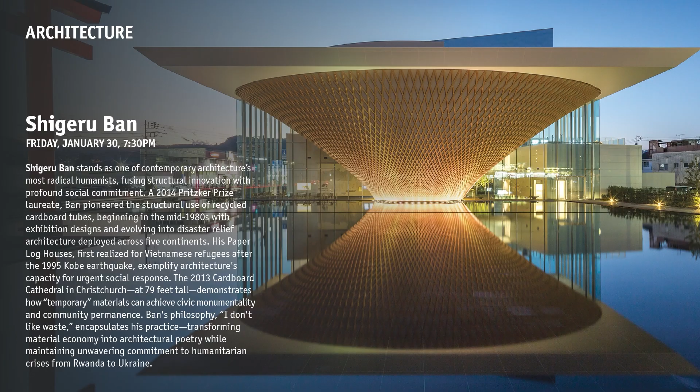Shigeru is from Tokyo, and he studied architecture right here in Los Angeles at the newly founded Southern California Institute of Architecture, SCI-Arc, back in the late 1970s, just after finishing high school in Japan, and I think he was like 17 years old. We were lucky enough to host Shigeru and the legendary late great architect Ray Kappe here at the Hammer in 2007.

Ray, who was the founding director of SCI-Arc and served on the admissions committee, told us that when he saw Shigeru's portfolio, his talent was so evident right off the bat that he had him just skip the entire first year curriculum. And by the way, you can watch the video of that. It's on the Hammer channel.

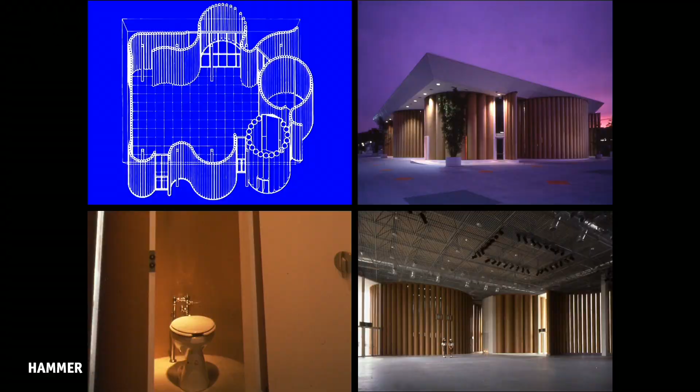1990. Actually I started developing in 1985, before people started talking about ecological issues, environmental issues, recycling. I just wanted to use this humble material for building structure, not to waste it. This is a temporary exhibition hall. It was too difficult to get government permission to use such an unusual material for structure. So this building is made with steel columns and a steel roof, and paper tubes were used as freestanding interior and exterior walls.

There are 300 tubes, 8 meters in length, about 27 feet. The diameter is 55 centimeters. Wall thickness is 3/4 of an inch. And of course, inside is empty. Some of the tubes are bigger; the diameter is 4 feet. Inside is a toilet. In case you finish your toilet paper in an emergency situation, you can tear off the inside of the wall. Next, please.

Nobody hired me to design a building out of paper, so I had to make my own weekend house to get government permission. I spent a year testing. Finally, I got the permission. So this became the first permanent building with a paper tube structure. However, I'm busy traveling. I have no weekend. That's why the house is still empty. But it's still there. Next, please.

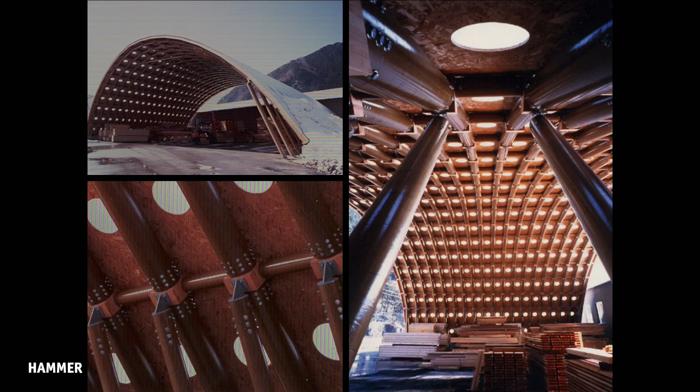A few years after, I was asked to design a big roof for local carpenters in a very heavy snow area. They wanted to build it by themselves without a steel structure. So this is the second permission, with paper tubes with wooden joints to make a permanent structure with government permission. It still remains. Next, please.

In the year 2000, the world started talking about environmental issues. This is the World Expo in the city of Hanover in Germany. The main theme of the Expo was environmental issues. Because I was the only architect using recyclable material for buildings, I was chosen to design the Japanese pavilion. I was very lucky, as I was introduced, to collaborate with a genius architect from Germany, Frei Otto, to make the first paper tube grid shell structure.

These paper tubes, of course, were produced locally in Germany. As part of the contract, they had to promise us to collect all the paper tubes after the building was demolished and recycle them again. Also, I didn't want to use concrete because concrete cannot be recycled. I made a wooden box filled with sand instead of a concrete foundation. Membrane: normally we use a PVC membrane, but PVC is not environmentally friendly. I made a membrane out of paper. Because paper is an industrial material, we can waterproof or fireproof it easily.

And we had to test in Germany. This is the one we developed. And this yellow scaffolding can be rotated by hand to push up little by little, to create three-dimensional forms to stabilize the structure. Next, please. We covered over 25,000 square feet. The connection is just fabric tape.

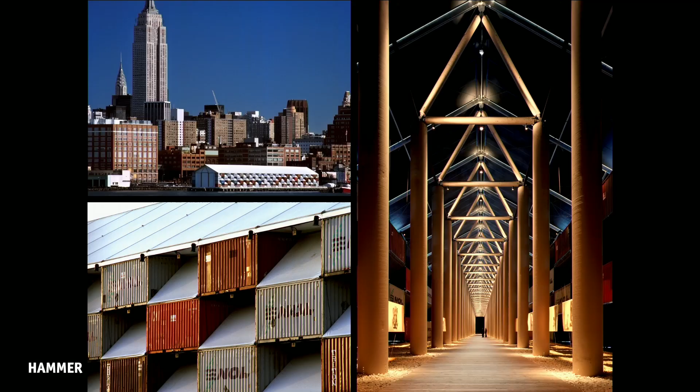It's very inexpensive, easy to install, easy to dismantle, so that most of the material was recycled. Next, please. This is called Nomadic Museum. This is a movable museum for the Canadian artist Gregory Colbert. He asked me to design his own museum to travel from city to city, country to country.

The first one was built in New York on the wooden pier. This is about 200 meters. I used 20-foot shipping containers, not because shipping containers can be traveled. I used shipping containers because this is an international standard. We can find used containers anywhere in the world. So here in New York, we just rented the used containers during the exhibition for 4 months.

And after New York, we went to Santa Monica, Los Angeles, without bringing containers. We just returned them to the original shipyard after the exhibition was over. Then we came to Los Angeles without containers because we can rent the same kind of container locally in Los Angeles.

In order to minimize the number of containers, I made a checkerboard pattern, and there's an existing connection in the corner to stabilize the structure. Inside, there are paper tubes of 33 feet length to support the roof, and Gregory's work was exhibited in between the columns.

Next, please. Here in Santa Monica, the parking lot we rented was not big enough to put the 200 meters, so we divided it into two 100-meter galleries, and Gregory additionally asked me to design a theater space, so I kept the space between the 2 galleries and put a new membrane roof to create a theater space. The number of containers is exactly the same as New York, but the size of the museum became 50% bigger than New York.

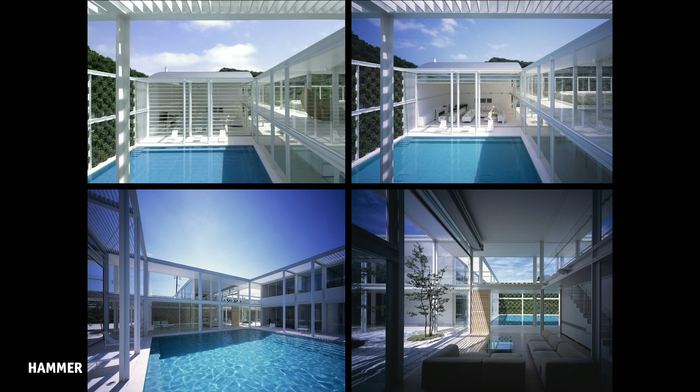This is a house in Fukushima. It's a rather big house for a Japanese house. However, there is no nice view around the house, so I made a courtyard and swimming pool, so that all the rooms are looking into the courtyard and swimming pool. And the client loved to swim.

So this is a big window made of a glass shutter, which is normally used for fire stations. I just improved it for residential use. You just push a button, it goes up immediately to connect inside and outside. Even this family room, when the glass shutter is open, is connected to the courtyard. So all the rooms are connected inside and outside. Next, please.

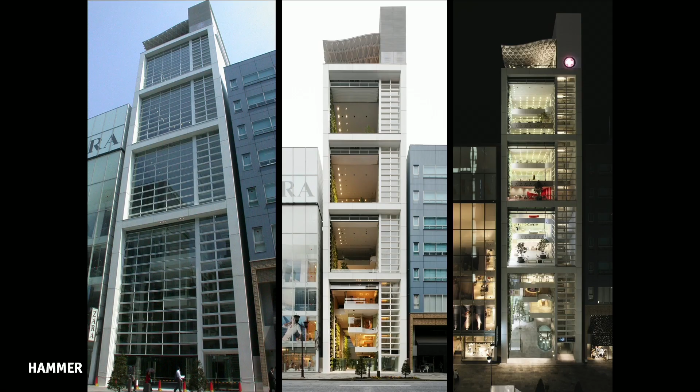This is the building in Ginza in Tokyo. Ginza is the most expensive commercial land in the world. That is why the site is very narrow and very deep. This was a competition for the headquarters of the Swatch company, the watch company group from Switzerland. The upper 9 floors are offices. Every 3 floors, they have atriums.

And normally, even during the nice seasons like spring and fall, the atrium has to be air conditioned. But I thought that is a waste of energy. So by opening the shutter, we can take advantage of natural ventilation without depending on air conditioning.

One of the challenges, this was not requested for the competition. They want to have 7 boutiques of the brand names they have, like Omega, Tissot, Jaquet Droz, Blancpain, and so on. Because the site is very narrow, if we have one boutique in front of the busy commercial street, the rest of the 6 boutiques have to be downstairs, upstairs, or at the back of the house.

And then I thought that's very unfair not to have direct access from the street. So this was my own challenge, to have a direct access from the street to all of 7 boutiques. So what I did is opening the glass shutter for 4 floors in front and the back, creating the natural public passage inside the building with green wall and some water feature. And along this passage, there are 7 glass showrooms of each boutique.

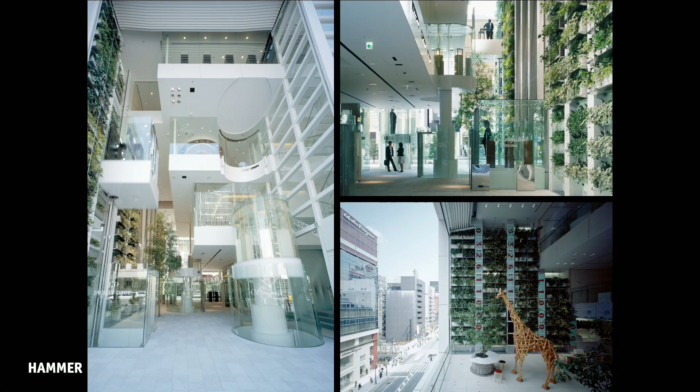Next, please. So like this. So there are 7 glass showrooms of each brand name. You can come in to take a look at the latest collection. If you want to see more, you have to push this button. Each showroom is made as a hydraulic elevator, bringing the customer to their own showroom here. This one goes to here. This one goes to here. So this is an unusual way to make all the customers go to the boutiques directly from the street. Because of this unusual idea, I won this competition to build this building.

This is the 5th floor customer service. You don't need to own the Omega watch to come to this space. It is free to come in. So if you have a chance to come to Ginza, please come in. This is when the glass shutter opened, so this became semi-outdoor indoor space.

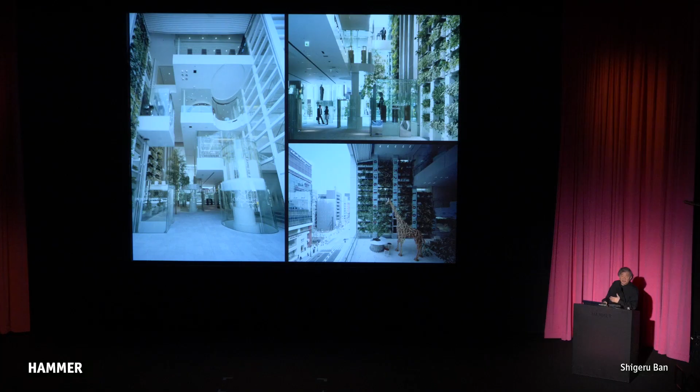And there's the true story about this giraffe. Just before the completion of the building, the president of the Swatch came to see the construction. I showed her around. And when I brought her into this space, she was very surprised. She said, "Where's the giraffe?" She misunderstood. During the presentation of the competition, in order to show the height of this space, I drew the giraffe in the section drawing, and she thought that is the final design.

So she was very mean; she said, unless I see the giraffe, I don't want to accept it as a completion of the building. So I had to spend my own money to make a giraffe out of wood. This is really a true story, not a joke. Next, please.

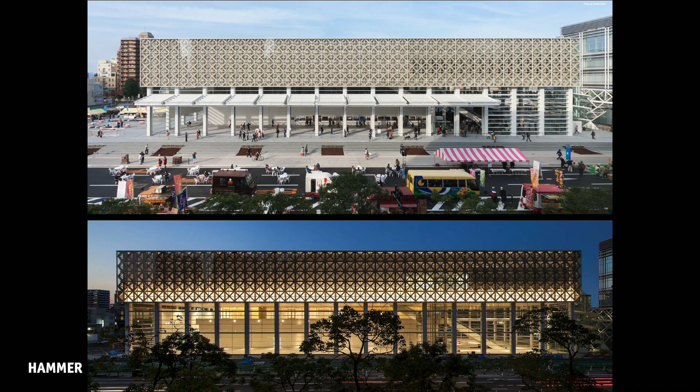This is a museum in Oita Prefecture in the south of Japan. Normally, we call the museum a black box or white cube because a museum is rather a closed building. But I wanted to open the museum to the street and public. So I created the so-called bifolding door to open the facade totally. Often they close the street to have a public event so that we can connect the inside of the museum with the event outside, so that people can come into the museum freely.

This Oita Prefecture is very famous for bamboo craft. So for the third floor gallery, structurally I used timber that looks like a woven bamboo pattern. Next, please. This is how the bifolding door can be opened. And the gallery on the ground floor, the ceiling is hung from the upper floor. That's why there are no pillars. There is a movable partition inside the wall to make any partition layout for different types of exhibition, or they can totally close. It's very flexible.

You can go up to the third floor, another lobby with the lattice work in timber, like a woven bamboo, to bring natural light into the lobby space. Next, please.

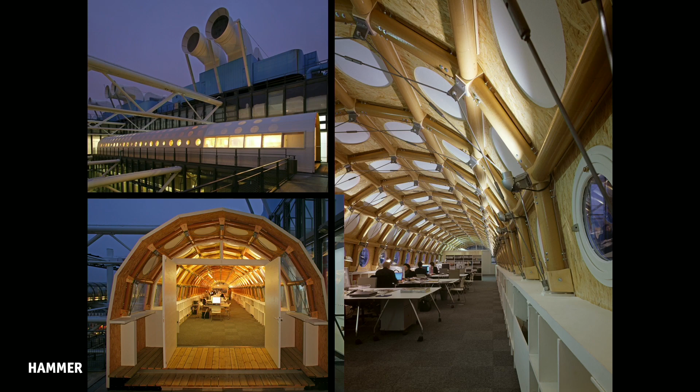This is the famous Pompidou Center in Paris, the national modern art museum in France, built by Renzo Piano and Richard Rogers, completed in 1977. In 2003, they organized an international competition to make a second Pompidou Center in the city of Metz, and I was very lucky to win. And I wanted to open my office in Paris because even very famous Japanese architects, for example, Tadao Ando, Isozaki, when I visited their museums built in a foreign country, often the completed building is different from what they submitted for the competition.

Then I found out why. Normally, we have to collaborate with local architects. Although we carefully choose the local architects, they often become our enemy. If they listen to us too much, they're going to be over budget or over the construction period. Instead of listening to us, they take the side of the local client because they have to take care of the building for many decades. That is why often the completed building is different from what was submitted for the competition.

I didn't want to miss this wonderful opportunity by working with bad local architects, so I decided to do all the construction documents and supervision of the site by myself by opening an office in Paris. However, renting an office in Paris is very, very expensive. I couldn't afford it. So when I met the president of the Pompidou Center for the first time, I asked him, please lend me the rooftop or terrace.

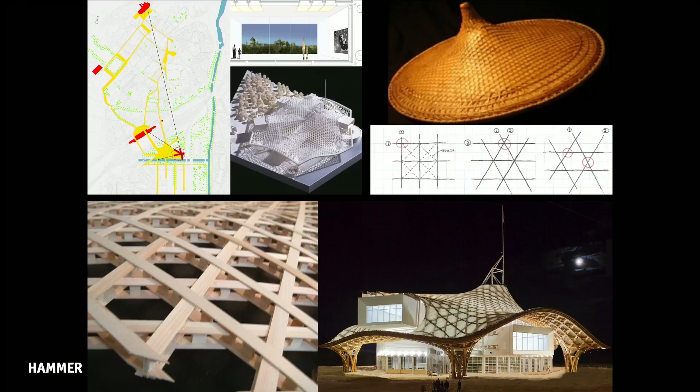Next, please. This is what I submitted for the competition. This is a map of the city of Metz. This is the central train station, 90 minutes by TGV high-speed train from Paris. Our site was the south side of the train station. The center of the city is the north side of the train station. Although we are far away from the center of the city, I wanted to connect my museum with the city.

So what I did is the following. This is the model I submitted. There are so-called gallery tubes. They're 50 feet in width and 300 feet in length, shifting 45 degrees, stacking on top of each other. At the end of each gallery tube, there is a big picture window. The top tube is facing the cathedral.

This is very famous. They have stained glass designed by Chagall. The first tube's picture window is framing the cathedral. The second tube is framing the train station. Because Metz is on the east side of France, after the wars it was occupied by Germany. There's much beautiful classical German architecture all over the city, including this train station, so this became an important history of the city. So the second tube is framing the train station. That's how I connected my museum with the center of the city.

The roof is made in timber. This is where the idea of the roof came from. This is a traditional Asian bamboo hat. I studied different patterns for the roof structure. Let's say if we divide by squares, it's easy, but the square doesn't have in-plane stiffness, so we need cross bracing, and the connection joints become very complicated. If we divide with triangles, it's easy and very stable without any bracing. But as you can see, at all the connections three elements are meeting, so it's rather complicated.

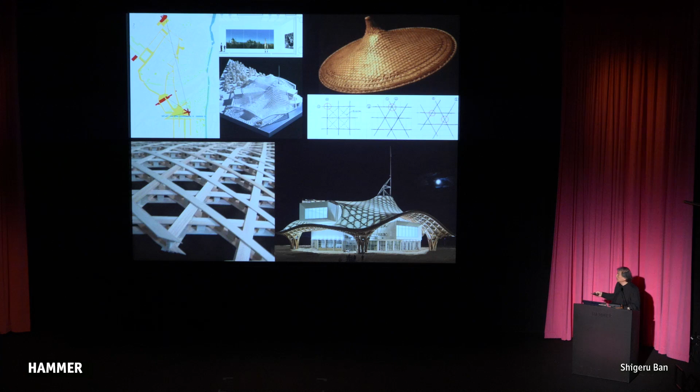Next, please. This is the completion. These are the picture windows, and people are waiting outside the glass shutters before opening hour under the big roof. Next, please. Then after opening, all the glass shutters open to connect inside and outside. This is a picture window framing the cathedral. The central tower is in steel for the elevator and the emergency stair, so this timber structure is hung. It's a suspended structure. Next, please.

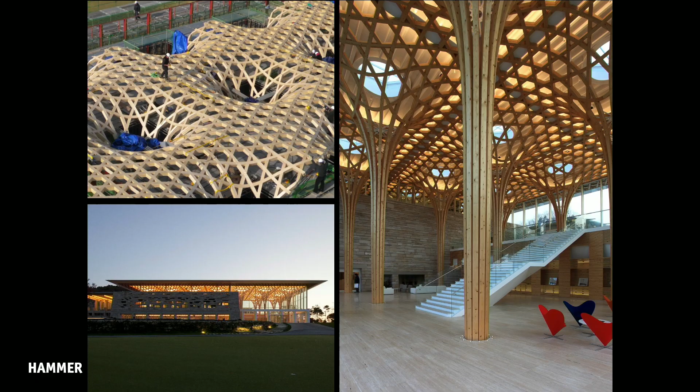While I was designing the Pompidou Center in Metz, I was asked to design a golf clubhouse in South Korea for one of the big companies. The chairman of this company loved my design of the Pompidou Center Metz. He wanted me to use a timber roof. So this is the assembling process.

All the timber was made in Switzerland. This three-dimensional cutting technology only exists in Switzerland and Germany, not in Korea or Japan. Normally I want to use local material as much as possible, but this was a request from the chairman to use this Swiss technology. So we cut all the timber in Switzerland and assembled it locally in South Korea.

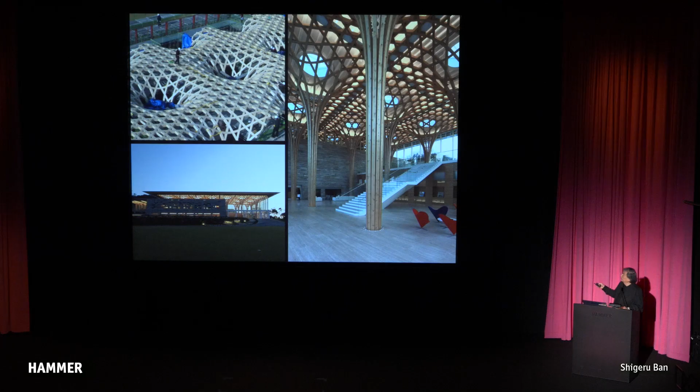Because I don't play golf, I didn't know what is inside the clubhouse. My only memory was when I was very small, my father used to take me to the practice range. At that time, we put the ball on a wooden tee. So that was my memory. Now it's in plastic. So this is a structure like a wooden tee.

Next, please. The same client asked me to design an employment training center on the same beautiful campus. The main function of this facility was a big auditorium, maybe twice as big as this. So it's a black box. I didn't want to put the black box on top of the beautiful landscape, so I put it underground. But I didn't want people to feel like they were underground.

So this is the foyer for this auditorium. It's a timber structure supporting the roof in glass with water. And each timber column has a pot made of stainless steel with mud, growing trees. So the pattern of the trees on the roof was extended onto the water pond, bringing light and shadow floating in the wind. Next, please.

This is a 7-story office building in Zurich, Switzerland. In Europe, they have a very good regulation called oversizing, where the wood protects itself from fire without any protection. By testing, we know that an extra inch, 25 millimeters, works as half-hour fire protection. 45 millimeters, a little bit smaller than 2 inches, works as 1-hour fire protection. So this extra thickness itself works as fire protection for the timber.

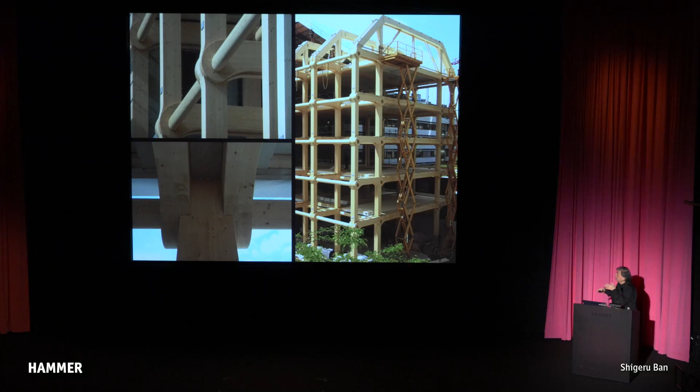So this building was built with this oversizing regulation. That's why we can expose the timber totally. Also the connection, again, I didn't want to use a steel connection. So the idea is the post with the 2 beams and the perpendicular beams, and the profile is oval. The oval profile beam is inserted. It doesn't rotate, it's locked. That's why it's good for lateral force without any steel connections.

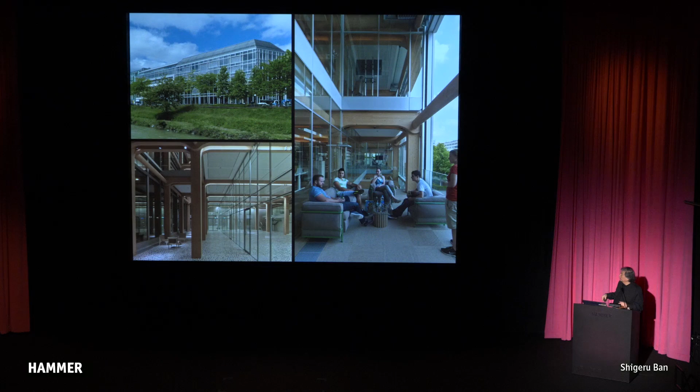Next, please. The exterior is a normal aluminum curtain wall with horizontal lines. This is a glass shutter, which can be totally opened to connect inside and outside to take advantage of natural ventilation. Next, please.

In Japan, we don't have a good regulation like Europe. We don't have a fire protection regulation like oversizing, so even to make a 7-story timber structure, the wood has to be covered by plasterboard, gypsum board, and finally covered by a very thin finish of wood. It's a fake. I don't like this kind of fake timber structure. So because of that, I came up with a new idea.

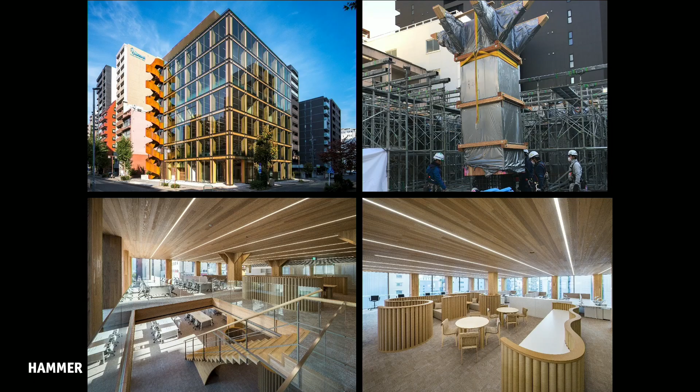This is a concrete form made of CLT, cross-laminated timber. Normally, we make a concrete form with wood. Then after the concrete is dry, we remove the concrete form, throw it away, and finish with stone or wood or whatever they like. So there are many layers, and the concrete form is wasted. So here, I made the CLT concrete form kept as the final finish for the columns and slab, so that it's not only the finish, but we can save a lot of time removing the forms and finishing again.

Also, this CLT concrete form reinforces the concrete for bending. So it's working together as a hybrid of concrete and timber for the lateral force, and it looks like a timber structure. Next, please.

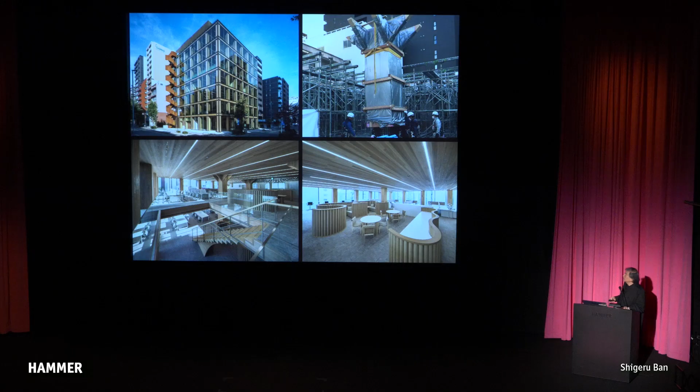This is a project called La Seine Musicale in Paris. It's a music theater complex. This is an island on the Seine River. It used to be a Renault automobile factory until the 80s, then they moved out and it became empty. The French architect Jean Nouvel made a master plan. They organized a competition to make a theater complex, and I was very lucky to win this competition.

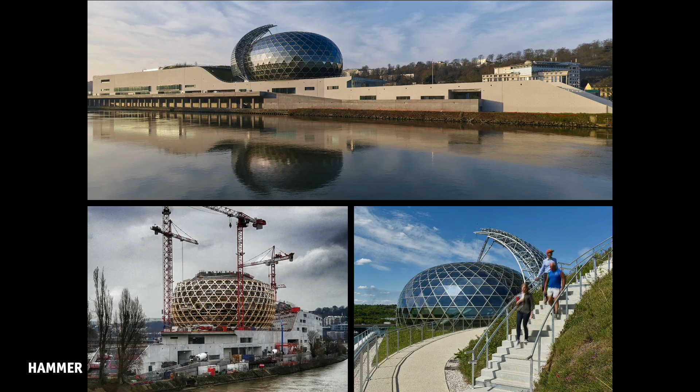Because the location is kind of an intersection of many different highways, the local government wanted some kind of symbolic form for this project. I made a 1,200-seat classical music concert hall as an egg shape in timber, clad with glass. And this is a sail, like a ship.

Instead of receiving wind force, it receives sun and generates energy, and it rotates following the sun, so the sail is always facing the sun, generating energy efficiently and creating shading behind to save on air conditioning. Also, depending on the time of day, the shape of the building is different.

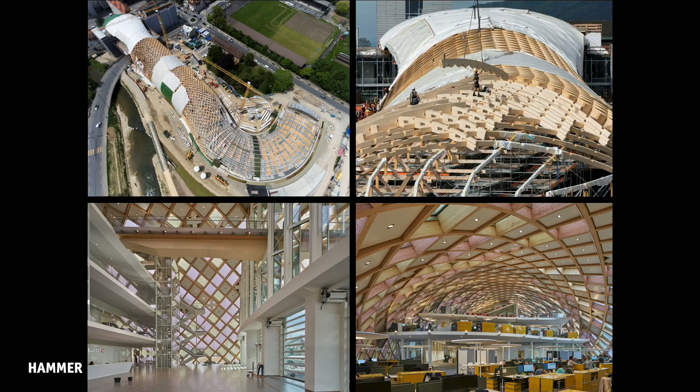Next, please. These are construction photos. Using this advanced timber cutting technology in Switzerland, we can cut each piece very, very precisely, so that we just need a hammer to fit them very easily and quietly. And this is the inside of the office, inside the foyer, lobby space. Everything is made in timber.

Next, please. The building in front, this is the museum for Swatch and Omega, and also a conference hall. Only the ground floor, the pilotis, is made in concrete. The rest of the four floors are made with timber beams, timber posts, and timber floors. And this is the conference hall. The roof is coming from the Swatch headquarters, covering the conference hall. Next, please.

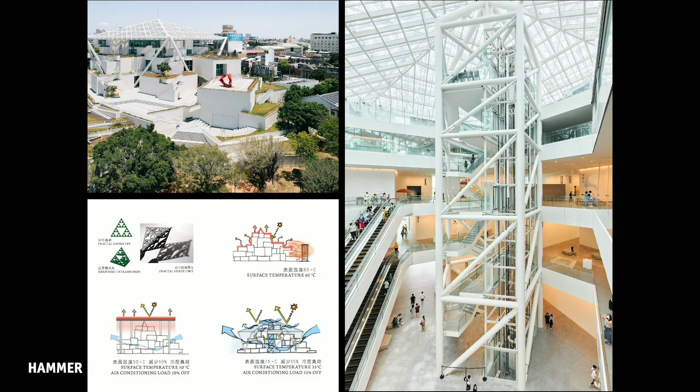The fractal roof is based on fractal geometry. With fractal geometry, you can divide, for example, this is the triangle fractal geometry. You can divide, and you get the same proportion of triangle forever. And Professor Sakai of Kyoto University found out, by making three-dimensional fractal geometry with openings, that putting it in the wind creates movement of the air, so he made a small pagoda, a rest space in the park. So I collaborated with him to make a big fractal roof.

This is a computer simulation. Let's say that the building is exposed to the sun. The surface temperature becomes 60 centigrade. I already forgot the Fahrenheit.

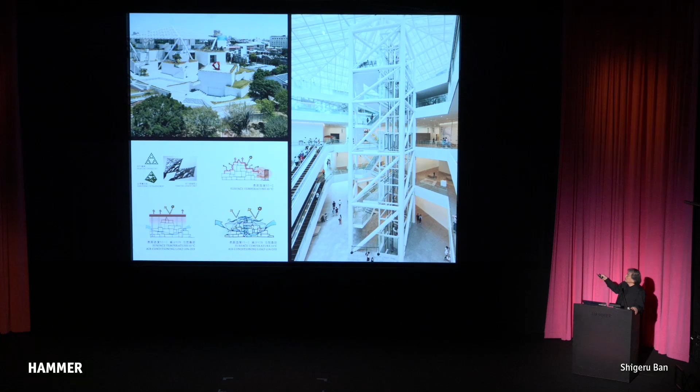Let's say 60 degrees. If we have a roof, we can save about 10% of the air conditioning, but still the roof makes radiation. Having the fractal roof is like being underneath big trees, because each leaf makes movement of air. That's why it's very cool being underneath big trees. It's the same effect. And by computer simulation, we found out we can save about 15% of the energy. So that is why I put the big fractal roof on top of the building, creating light and shadow, bringing it into this atrium space. Next, please.

This is a museum and hotel restaurant in Hiroshima. It's a big, long site facing the ocean, and this is a private museum, and 10 villas to stay over. These are the villas I designed a long time ago. You can stay over, and the restaurant, and these are 8 cubes, which are movable galleries.

Because the site is away from the center of Hiroshima, in order to make people come back again and again, I wanted to make the museum galleries move. Depending on the type of exhibition, the layout of the galleries can be adjusted and changed. Also, Hiroshima is very famous for shipbuilding companies. There are many shipbuilding companies.

I collaborated with a shipbuilding company to make floating galleries. This was made by the shipbuilding company on a barge. As you know, a barge is a steel plate floating on the water without an engine. They bring the materials. So each gallery was made at the shipbuilding company, brought over by ship, and a crane put it on top of the water. Next, please. Each one, normally the foundation, the bottom of the gallery, is sitting on the bottom of the pond.

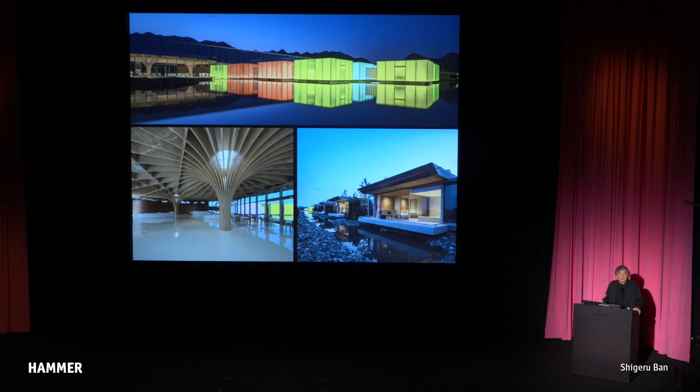By adding water, they can be floated. Then only two men can push them to change the location of the galleries. And this bridge can easily be displaced to connect to the other opening to have a different layout of the gallery. So depending on the type of the exhibition, the shape of the museum changes.

This is the foyer made in timber structure, and there are 10 villas to stay over. If you have a chance to come to Hiroshima, please stay over here. Next, please.

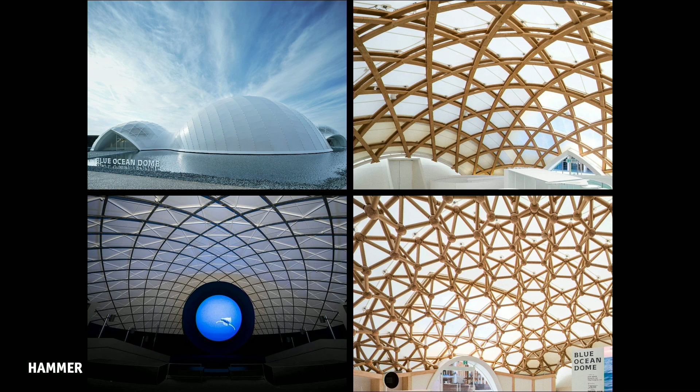This is the Expo Pavilion. Last year, we had the Osaka Expo, and this is the pavilion called Blue Ocean Dome. The problem of building a pavilion in Osaka was the site was reclaimed land. That's why the ground condition is very weak. Even building a temporary structure, they have to put concrete piles, or they have to make a special foundation to support the building. But it's wasted, because after half a year, they have to be demolished.

As you know, maybe if you have seen, they made a big wooden ring. They spent $270 million to be wasted after half a year, because they have no use. But I didn't want to waste the material.

Like the Hanover Expo, where I made a paper tube structure to be recycled, this building is going to be reused in another location. I have a project in Thailand, and my client bought this building to put on their site. But also, I didn't want to make a special foundation in concrete, so I made a very lightweight structure in order to avoid the concrete foundation.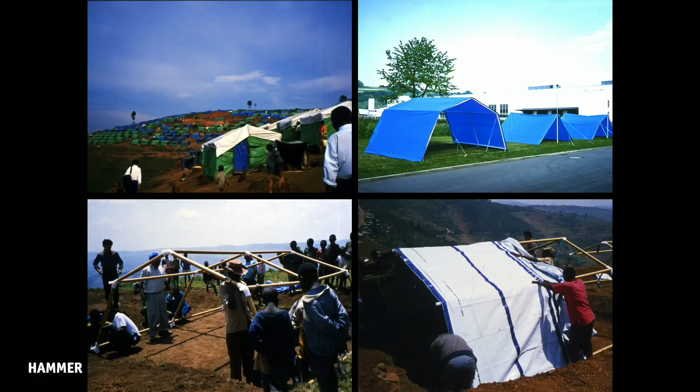This is the Byumba camp. I went there to put up the paper tube shelter. Also, I wanted to make something more comfortable. However, because of United Nations policy, we are not supposed to give them something too comfortable, because if the shelter is too comfortable, they're going to stay there longer.

The United Nations want them to go back to their original village and city as soon as possible, so that I got only $50 per unit. So that's why this development is only to stop deforestation.

And I proposed to the priest, why don't we build a temporary church out of paper tube? And he thought I was crazy, proposing building the building out of paper after the fire. So he didn't believe me. But I didn't give up. So I commuted to Kobe every Sunday.

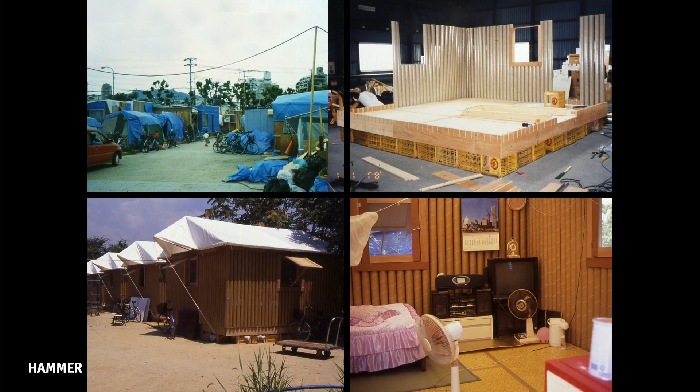Next, please. Then I got to know the Vietnamese people. They were living like this in the park with a plastic sheet. On fine days, inside became totally like a greenhouse. It's so hot, and on rainy days it totally gets wet. Although the government started building temporary houses, because Kobe is very dense, all the temporary houses were built in the surrounding area. But the Vietnamese people had only jobs working for a particular factory in a particular area. They didn't want to move to the temporary houses because they could not continue commuting to the factory. So they wanted to keep staying in this park.

But the neighbor Japanese people tried to kick them out because they were afraid this park was becoming like a slum. But they had no place to go. So I thought that we had to provide them something comfortable, but the shelter had to look totally temporary to be accepted by neighbor people. So I brought my students to start building the temporary shelter with paper tubes and beer crates.

At that time, in Japan, there were two major beer companies called Kirin and Asahi. They are competing, and Asahi made their beer crate red, which doesn't go with the color of the paper tube. So I asked the Kirin company to donate. And we were very disappointed because Kirin is such a big company, and we were expecting to have beer crates with beer inside, but they were totally empty.

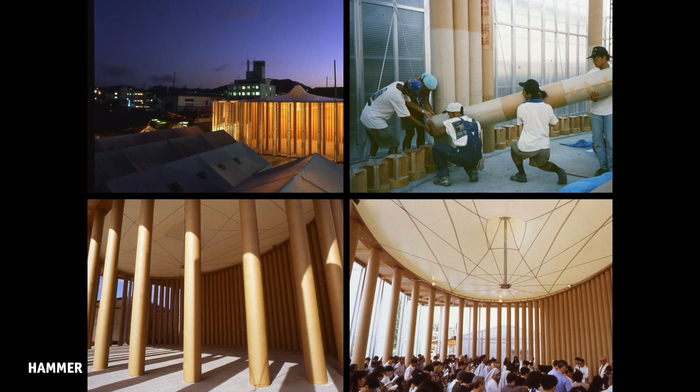This became a community center and the symbol of reconstruction of the city, used for many public services: weddings, concerts, movies, meetings, so this became not only for religious services, but also a community center. After 10 years, they decided to build a bigger one that I was very lucky to design, but also there was a big earthquake in Taiwan. We decided to donate it. Next, please. We disassembled it to ship over to Taiwan and rebuilt it as a permanent church and community center. It's still there. So this became permanent.

Then I wonder, what is the definition of a temporary structure? What is the definition of a permanent structure? As you can see in a big city like Los Angeles or Tokyo, suddenly big concrete buildings disappear, especially commercial buildings. A building made to make money, even in concrete, can be very temporary, because another developer buys the site and destroys the existing building to put up a new one. So even a building made of paper by students can be permanent as long as people love it. So that's my definition of what is temporary and what is permanent. Next, please.

1999, in Turkey, they had a big earthquake. I was asked to make temporary houses. All the material was locally available; even the paper tube and beer crates were donated by local manufacturers, totally free. And children helped us put waste paper inside the paper tubes to make the walls more insulated. Next, please.

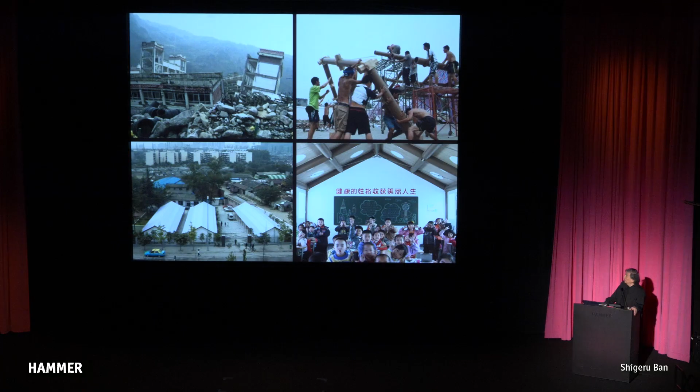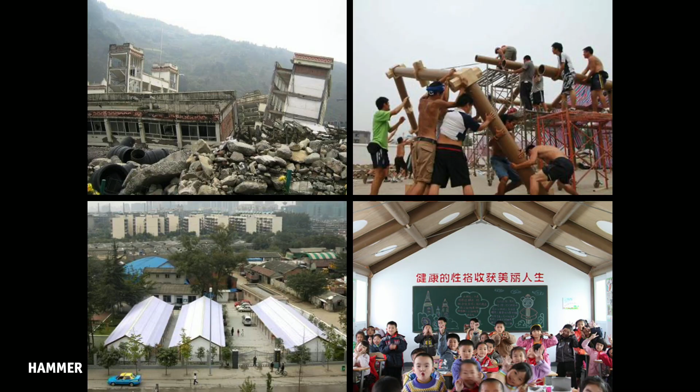Instead, I met a schoolmaster. She asked me to design temporary classrooms. So I brought my Japanese students to work with local Chinese students for 5 weeks together, using locally available paper tubes and wooden joints. We made 9 classrooms just by students. It's still there. Next, please.

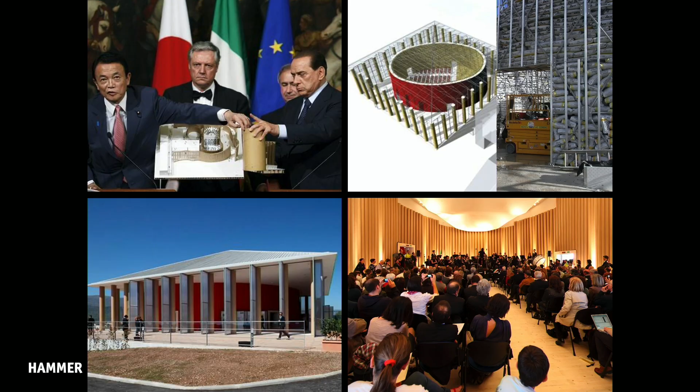2009, L'Aquila in Italy, they had a big earthquake. After the earthquake, I went to see the mayor. He asked me to design a temporary concert hall because L'Aquila is very famous for music. They have their own orchestra and also a school of music, but no place to play. All the concert halls were destroyed. So I started designing a temporary concert hall.

And I got a phone call from the embassy of Japan in Rome, and they wanted to support me. This is the former Prime Minister of Italy, Mr. Berlusconi, and he decided to bring the G8 summit. At that time Russia was part of the summit, not G7, G8. Because of the earthquake, Mr. Berlusconi decided to bring the G8 summit to L'Aquila to get some support from the international community.

And this is the former Japanese Prime Minister. The embassy organized this press conference with 2 Prime Ministers, with my model. I'm sure Mr. Berlusconi doesn't know what he's holding. This is a paper tube. Because of this successful press conference, I got €500,000 to build the temporary concert hall.

Even for a temporary concert hall, the acoustics have to be very good, but I didn't want to use concrete. So this is a steel frame filled with sandbags, covered by a donated red curtain. Inside is covered by paper tubes of different diameters to make good acoustics; that's not structure, but the exterior tube is a structural paper tube. And this is the opening concert. It's still there. People really enjoy using this concert hall still. Next, please.

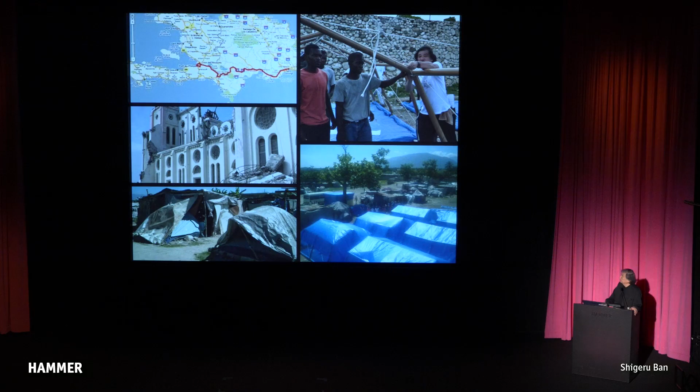2011, northern Japan, including Fukushima, we had a big earthquake, tsunami, and nuclear problems. After the Kobe earthquake, when I went to the evacuation facilities, I was very shocked. People had to sleep on the floor without any privacy. I believe that privacy is the most basic human right, but the government didn't care.

So from 2004, almost every 2-3 years we have had a big earthquake. I started preparing the partition system with my students, but the government never allowed making them because there was no example. But I didn't give up. Little by little, I improved it. So in 2011, I developed the fourth version. This is the normal condition. People sleep on the floor without any privacy.

But I went to visit many evacuation facilities and demonstrated, but the government officials didn't allow me to build. But at this gymnasium, unfortunately, the city hall was destroyed by the tsunami, and the mayor and city officials were killed. Normally the evacuation facility is organized by city officials, but this was organized by a high school physics teacher. So he was very kind to accept my proposal, making this partition.

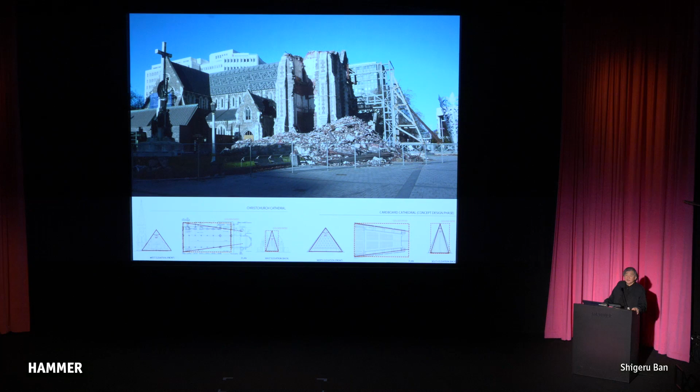A few weeks before the earthquake in Japan, there was a big earthquake in Christchurch, New Zealand. I got an email from one of the priests. He said, "You must be the architect who can design a temporary church free of charge." I said that I'm happy to do it if this is not only for religious service but also public use. So although I was very busy commuting to the north of Japan, I also commuted to New Zealand.

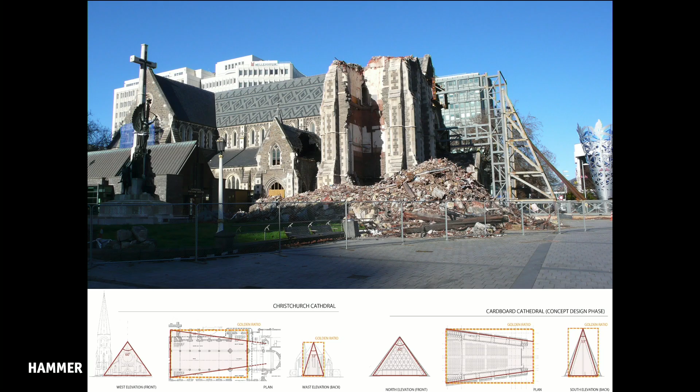And the first thing I did was analyze the floor plan and the elevation of the original cathedral, finding out many rules like golden sections, and used these rules for the design of the temporary cathedral. Next, please. Some photos are missing, but anyway, this is a shipping container, and paper tube is sitting on top of it. The inside is like this. Although this was meant to be temporary, this became a tourist destination and is still there. People really love it. Next, please.

2014, big earthquake and typhoon at Cebu Island in the Philippines. In the Philippines, they have a big beer company called San Miguel. I asked them to donate beer crates, but they were so difficult. So finally, I had to use Coca-Cola crates. Next, please.

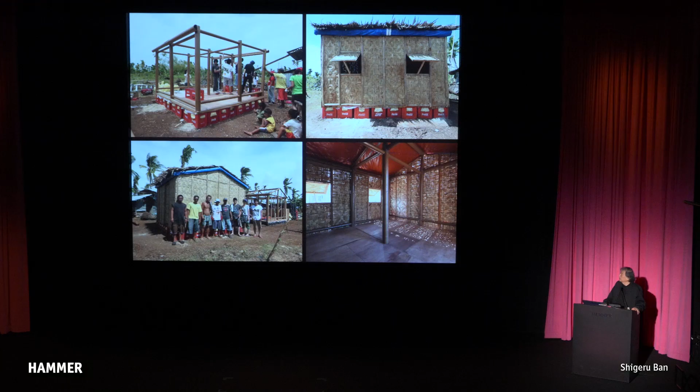2015, Nepal. They had a big earthquake. Most of the buildings are made of brick. They are not good for earthquakes, but I didn't want to waste this rubble brick. So this is a test I did in Japan, using the brick inside a wooden frame to meet the Japanese earthquake regulation. So these are the houses we made with this rubble brick with this method.

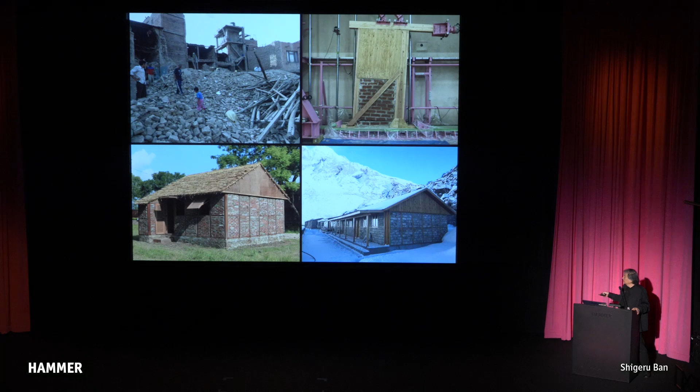And also we made a school on top of the mountain. There was no brick, so we put stone instead. This became a permanent elementary school. Next, please.

2023, I was very busy because earthquakes were everywhere in the world. This is one I built in Turkey near the Syrian border with local students, with paper tube locally available. This is one we built in Morocco near Marrakesh, also the same one with paper tube locally available. This is one in Lahaina, Maui, Hawaii, because of a big fire. And this is one in the Noto Peninsula in Japan.

Actually, they had another bigger earthquake 2 years ago, January 1st, but this was built half a year before. There was another earthquake. This wooden house was not destroyed by the first earthquake, but the second bigger earthquake destroyed it. My paper house was not destroyed by the earthquake. Even with the wooden house lying on my paper house, it's still okay. Next, please.

Also, I made a permanent temporary apartment for the victims. Normally, the government makes a single-story prefab house, and they have to move out in 3-4 years and destroy them to waste them. But I thought that is really a waste of money and also creates lots of rubbish. So I made the temporary house with the same budget as the prefab house, in timber, but it can be used as a permanent house.

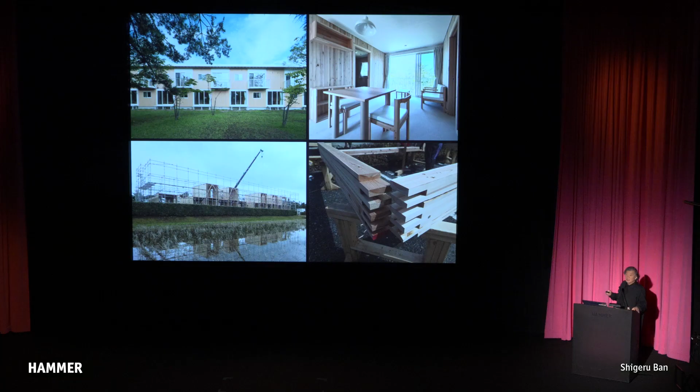This is a technology called DLT. DLT stands for dowel laminated timber. Instead of CLT, cross laminated timber, which has to be made in some big factory and shipped over, this one is dowel laminated timber. Dowel is a wooden dowel. We just put the standard 2x4, make a hole and hammer down the wooden dowel, like this one, without any glue. We can use local timber on site without any machine to make a finger joint very easily to make this box, stacking on top of each other in a checkerboard pattern.

So it only takes 3 months. We made 130 units, and each one can be built in 3 months. And inside is like this. We can expose the solid timber wall inside the house, and we even provided the furniture. Next, please.

Also, in the Noto Peninsula, they have very nice traditional houses with beautiful roof tiles and beautiful timber structures, but they have to be destroyed by machine and wasted. I thought it is such a pity to waste such beautiful materials. So I made a group of students to collect them, to reuse the roof tiles and also the timber. I rented a warehouse, collecting before the government cleanup, and stored them. We already got 30,000 roof tiles to be used.

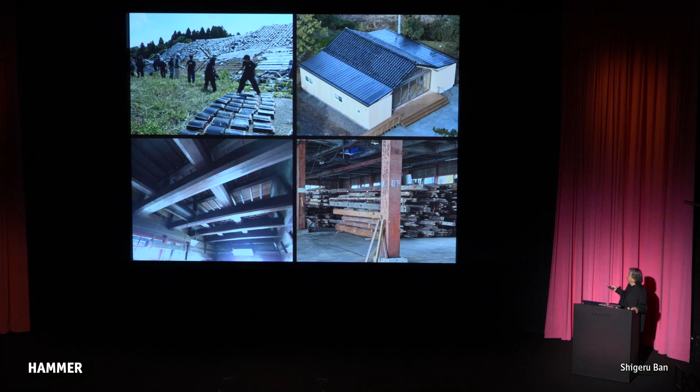This is a community center we built next to my temporary house using these roof tiles. This is a similar one I'm building in, not Lahaina, Altadena after the fire. So this is what we are doing right now. Next, please.

Last project, a series of projects in Ukraine. Almost 4 years ago, in February, Russia invaded Ukraine and created a lot of refugees. This is a refugee evacuation facility. It's just like a Japanese evacuation facility after the earthquake. There's no privacy. So I went there with local students. This is my NGO, Voluntary Architects Network. We created the same type of partition system. All the paper tubes were donated from a manufacturer in Poland. In Poland, Ukraine, Slovakia, Berlin, and Paris, we built like this.

Next, please. Also, as you know, Russia attacked the power stations. I found a very inexpensive, lightweight stove. You can cook on top of this. I bought 200 of them to provide them. As you can see, he's so happy to receive my stove, but he's injured and his house was burned by a missile from Russia. Next, please.

Also, I'm preparing an affordable housing system with a university in Poland. This is a system made of styrofoam. Styrofoam is a very lightweight insulation material, also used for packing boxes. We put glass fiber and paint the plastic. It's called glass fiber reinforced plastic. This is nothing special. It's traditional technology to make a middle-size boat. Even surfboards are made by the same technology. Everything can be done by students without any machine.

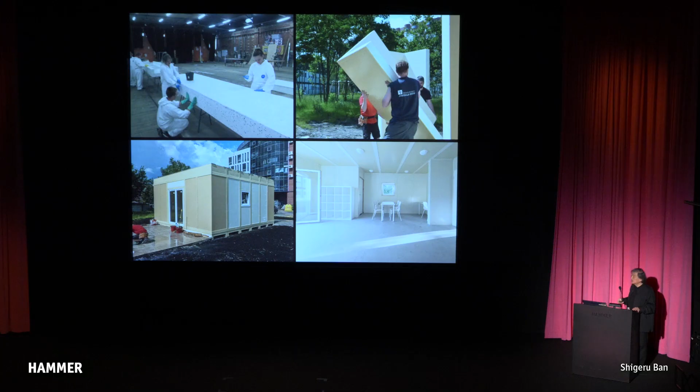So it's a modular system. It's lightweight, as you can see, and very thick, very well insulated. The house was assembled by students in 1 day in the city of Lviv in Ukraine. So we are now preparing the affordable housing system. Next, please. This is the last slide.

This is the mayor of the city of Lviv. Lviv is on the west side of Ukraine. It's rather safe compared to the east side. That's why so many people injured in the war come to the hospitals of Lviv, and they're over capacity. So the mayor asked me to design a hospital of 250,000 square feet in timber. They have the biggest laminated timber factory in Eastern Europe, which used to export to Canada and the US, but now they cannot export. So he wants to use the local timber.

However, Ukraine's building regulation is like Japan's. They cannot make a building of such size in timber because they don't have such a rule. However, as you know, after the war they want to be part of the EU. So the mayor asked me to design the hospital with local timber, applying EU building regulations. As I showed you with the one in Switzerland, we can make such a building in timber. So this is going to be the first hospital built in timber with EU building regulations.

Now we are still designing. The construction is supposed to start at the beginning of this summer. I hope that this becomes the symbol of the reconstruction of Ukraine.